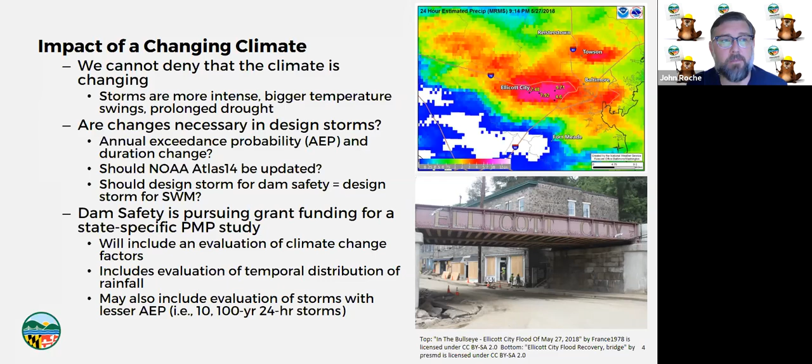Another thing we're seeing is that dams are aging and there's a lack of maintenance on some of them. I think this is particularly true in the farm pond arena, where they either still exist for agricultural purposes or have become a nice water feature for a homeowners group. The average age of inventoried dams in Maryland is over 50 years now, and likely a lot of these small ponds are of similar age.

We're often finding ponds with new owners who have no idea of the required maintenance obligations. They think, well, if I purchased it in this condition, that's probably how it should have been, right?

This leads us to the question: who is responsible for inspecting and enforcing proper maintenance of these farm ponds? I have some ideas here. I'm not saying any one of them is right, but it's something we need to be thinking about.

From one perspective, you could say that if the original approvals included maintenance requirements, then that original approval entity, like the SCD, ought to be responsible for ensuring those requirements are met. That's one option. Another person might say the local stormwater management agencies are doing triennial inspections on all the stormwater ponds in their states.

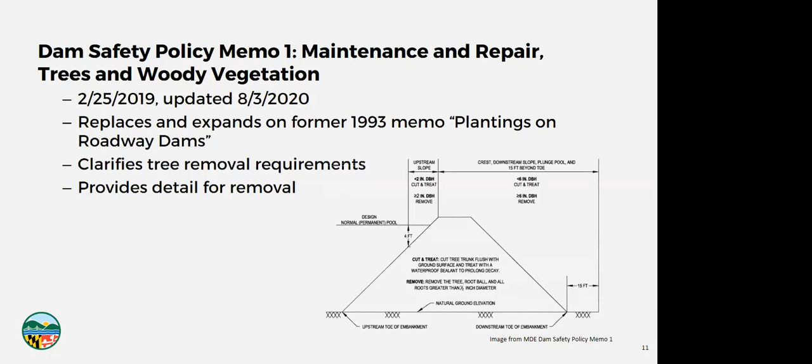We took some national guidance from U.S. Fish and Wildlife and other entities and developed some expectations, so we have consistent tree removal expectations throughout the state, which helps on everybody's end. Consistency makes things more efficient. It prevents those roadblocks that come up and the frustrations. We've also provided a detail that you can give to a contractor for what's expected for removal of the roots of trees, if that's necessary.

Policy memorandum number 2 deals with roadway and railroad embankments that have a culvert or potentially may act as a dam. Now, the existing 378 language for road embankments, or special embankments as they're called, is confusing. We know that because we see inconsistent application of that guidance, and it's really a language issue. It's unclear language. So what we've done with this policy memorandum is tried to resolve that confusing language with some diagrams and some additional, hopefully more clear, plain English to allow you to understand when an embankment may excessively impound water and act potentially like a dam.

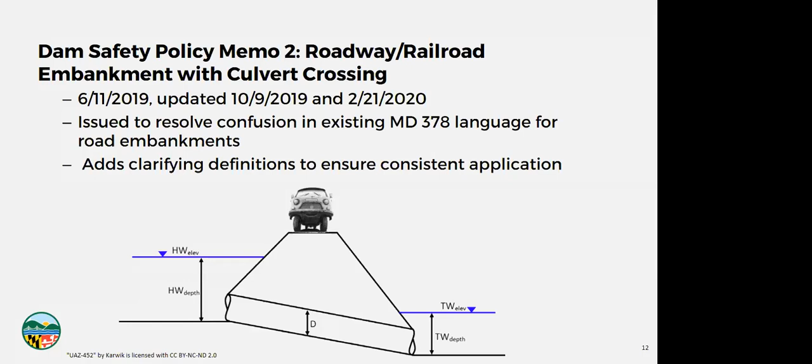Policy memorandum number 3 has limited application, but it resulted from some field inspections and concerns that were addressed as we were asked for technical assistance on a small pond issue. It deals with the dangers of siting a dam or pond at the crest of a very steep slope. In those cases, sometimes what you're doing is relying on that natural ground and the unknown geology of that ground to be the dam and impounding structure, incidentally or intentionally, and that could cause problems with slope stability and seepage issues. So there's some guidance here on what we think is appropriate setbacks and geometries to prevent some of these issues.

Memorandum number 4 expands on the guidance that we've put out for dam breach analysis that Scott touched on. It came about after a review of a number of small structures, and I mean bathtub type structures, where it just doesn't make sense to go through a long, lengthy dam breach process. So this provides for kind of a simplified hazard classification for really small storage volume and height structures, where we can all basically agree, yes, this is a Class A pond without any further analysis.

It talks about best practices for the construction of dams and small ponds. Now, we discussed this, provided this presentation in 2019 at the seminar at the Maritime Institute, and we're still working on this. We've got multiple stakeholders assisting us to determine what is the appropriate element here for how to supplement the Maryland 378 specifications. In my opinion, these specifications lack detail and are not comprehensive. It talks about, for instance, required soil compaction, but it doesn't talk about how frequently you should take the compaction testings and things like that.

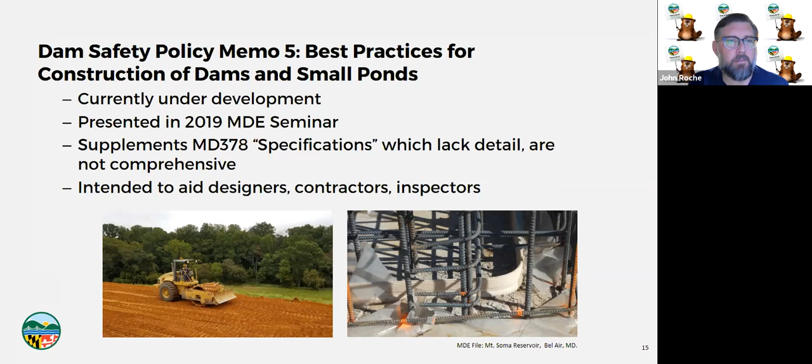Scott talked about the need for a permit anytime you change a dam. Policy memorandum number 6 about dam decommissioning addresses that issue. Dam removal ought to require an approval as well, because it is a change to the structure.

For a long time, dam safety has had an unwritten understanding of what's expected, what's the proper design for a breach channel through an earthen embankment. This formalizes that and writes it down finally, so we all know what it is, it's clear, and you can have that before your project kicks off.

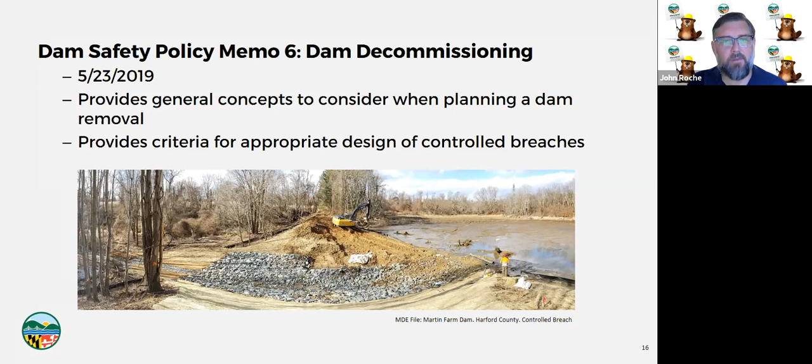This document also provides general concepts to consider when planning a dam removal, like outreach to other resource stakeholders like DNR, and they might have concerns or support of the project, and what to do about the sediment stored behind the dam. So that's a good document if you have a potential removal project to look at.

Number 7, we're halfway through now, talks about impoundment filling plans. Hal talked about how a lot of the dams he showed failed on or shortly after first filling. I think this really relates mostly to dams and not small ponds, and that's okay, but I still want to mention it to you all.

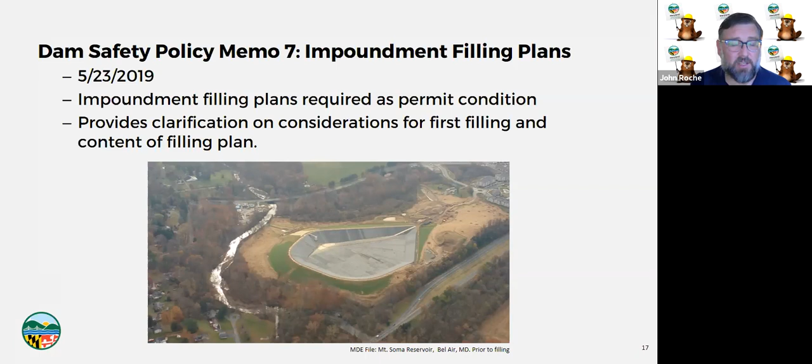Our permits for dams require an impoundment filling plan be provided to the department before you start filling the dam embankment with water. Again, this is the first time that they've felt these kinds of stresses and pressures, so we want to make sure we have all expectations on filling rate, monitoring, things to watch out for. This provides clarification on what we're looking for. Previously people would just ask us, well, you have this permit condition, but what do you need? Now we're putting it out there.

Policy memorandum number 8 touches further on some of the stuff that Hal talked about, structural considerations for design of risers and trash racks. This is under development with multi-stakeholder input received, and really both COMAR and 378 discuss structural design in some ways, but they don't take it all the way to make it an implementable recommendation. That's what this document is intended to do, closing that gap so we all know with consistency what's expected of us from the design side and the review side.

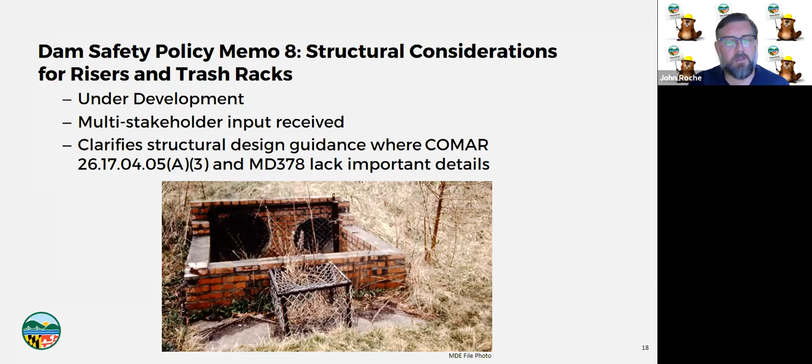John, we have 6 minutes to go, and there are a few questions there. Thank you, I'll try to go quicker.

Water storage and collection tanks. This addresses the broad definition of dam in regulations, where a tank could be considered a dam. So in some cases, you may need to submit your design to dam safety to see if there's a hazard that needs to be addressed or if this needs to be regulated as a dam or not, because in some cases it doesn't make sense.

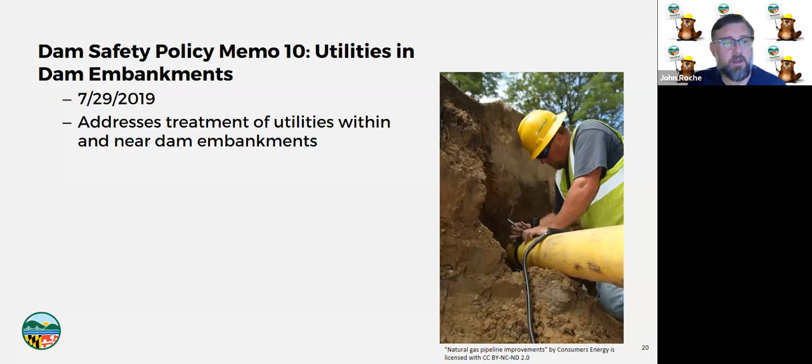Policy memorandum number 10 discusses utilities in embankments. Again, it just expands on what 378 and COMAR already say, as Hal talked about, providing consistency and clarity, because we think that wasn't always being read and understood in 378.

Policy memorandum number 11 is one that I hope people will be very happy to see. It talks about normal maintenance activities that shouldn't require approvals or permits. Normal maintenance, dredging of your sediment forebay, that's expected, right? That shows good ownership practices. So we made a list here of activities that we think can be considered normal maintenance and not require permits or authorization.

Lastly, policy memo number 12, excavated ponds, is providing clarity. There's some contradictory language in 378 about small ponds, excavated ponds. It's under development with multiple people weighing in and assisting us on this, and it's hopefully will be out soon. So that's some of what we're doing.

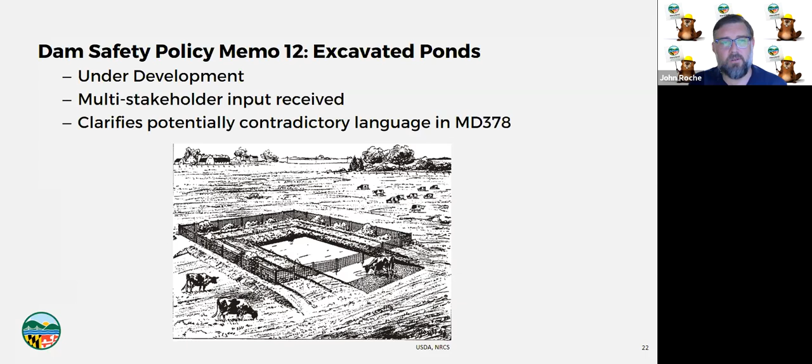We've also got a whole bunch of other future work planned, and I'll just touch on a few of these very quickly. We think there's a need for some consistent weir wall design guidance throughout the state. Maryland 378 refers to an actual rescinded section of the NRCS National Engineering Handbook that's been rescinded since 1986. So if you have some weir wall design guidance and would like to share it with us, that'd be great.

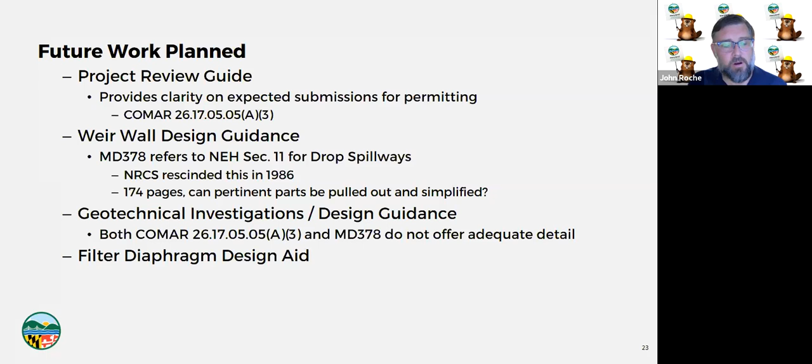We also think we need to expand on geotechnical investigations and design guidance recommendations. We started work on this a long time ago, and we need to pick it back up on a filter diaphragm design aid for everybody. There's a few other things here I'm going to skip so we can get to some questions.

But I do want to reinforce again, this is what we're seeing and what we think is important for us and for you. But there's probably things that we're not seeing and that we don't recognize as a need. So please, please, please let us know what else you need to improve consistency across your jurisdictions, across the state, so that everybody knows what's expected of them, and then we can go from there. All right, hopefully we have a few more minutes left for questions, and if not...